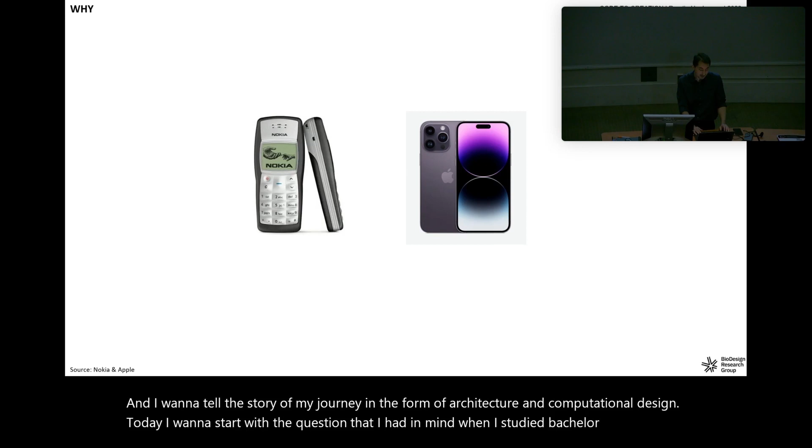I want to start with a question that I had in mind when I studied Bachelor of Architecture. I always wondered why there is a big difference between other industries' generations. For example, telecommunications now versus 20 years ago, or automobiles now versus 50 years ago. But in architecture, we are building our structures and constructions exactly the same way we did 100 years ago or even more, and it's mostly the same all around the world. Yes, there's a little difference in developed countries, but not that much. In comparison to other industries, we are a lot behind.

And the result is obvious. This industry, construction, is responsible for more than a third of energy consumption, waste we produce, and many other disasters. Considering the increasing need for houses, buildings, and many things, we really need to reconsider how we think about architecture and how we make everything.

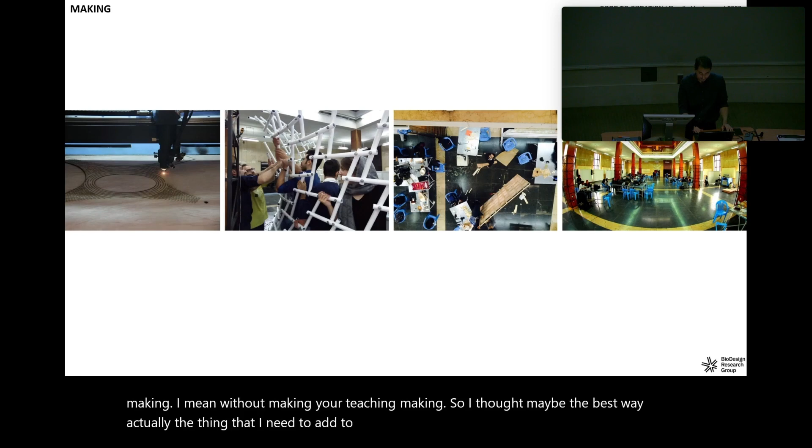When the university asked me to start teaching around 7 or 8 years ago, I started to think about how we are teaching architecture, which is about making, without practicing the making. Without making, we are teaching making. So I thought maybe the best thing I needed to add to my courses was about making something in the field of architecture.

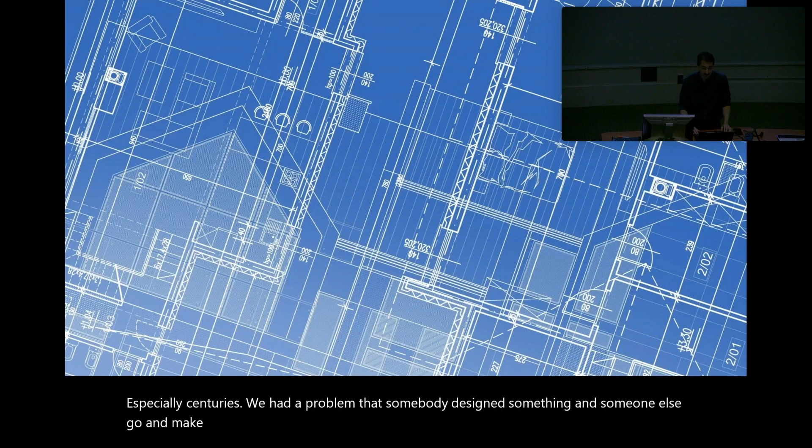When we talk about making and teaching in architecture, consider that thousands of years ago, when a person wanted to build something as an architect, the builder, the drawer, the designer, all of them, most of the time, were the same person and the same group. But after Alberti, during recent centuries especially, we had a problem: somebody designed something and someone else went and made it. When you're designing blueprints, you're not designing the building, you're just designing a notation of the building. You're not talking about every single detail in the building.

You just say, for example, 'the big rectangular wall here,' and the builder thinks about how it starts—for example, cutting the first brick, how to place the second one, how to frame this, and what the hierarchy is.

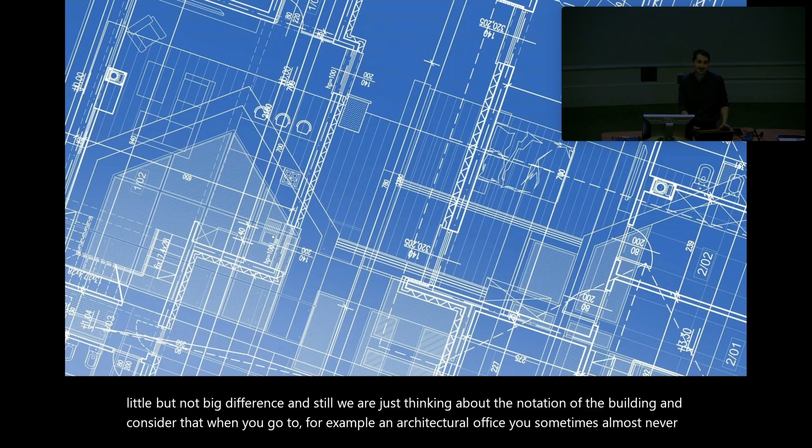With BIM technologies, it is changing a little, but not a big difference, and we're still just thinking about the notation of the building. Consider that when you go to an architectural office, you almost never leave your desk—you're just working behind the desk, designing something on the computer, and you don't know anything about what's happening on the real construction site.

Sometimes it happens. So I started my career working in an architectural office. After designing some projects, I understood that it's not really what I want to do. So I started a new kind of startup office, whose mission was actually research in the field of architecture, especially about making and digital fabrication.

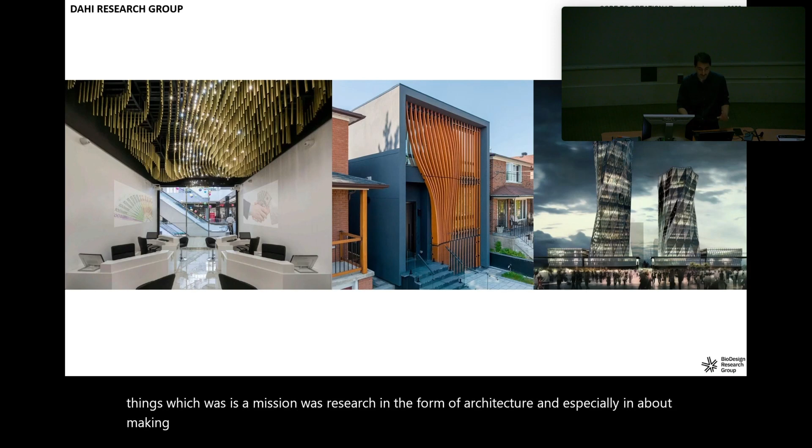After working on some different projects, most of our clients were actually builders and architects—we don't have any normal people as clients. We help architects and other builders to design, create, and build complex and new forms in general. After that, we understood that we needed a kind of digital fabrication laboratory too, because we cannot design something 100% new without knowing how we want to make it.

So we needed a prototyping lab. We founded a lab containing a robotic industrial arm, a CNC milling machine, laser cutters, and 3D printers that help us in prototyping our projects.

I want to start with some of our academic researches that we had in different universities. Some of them were 2-week workshops, some were a course, like a seminar course or a studio course. I want to describe some of them right now.

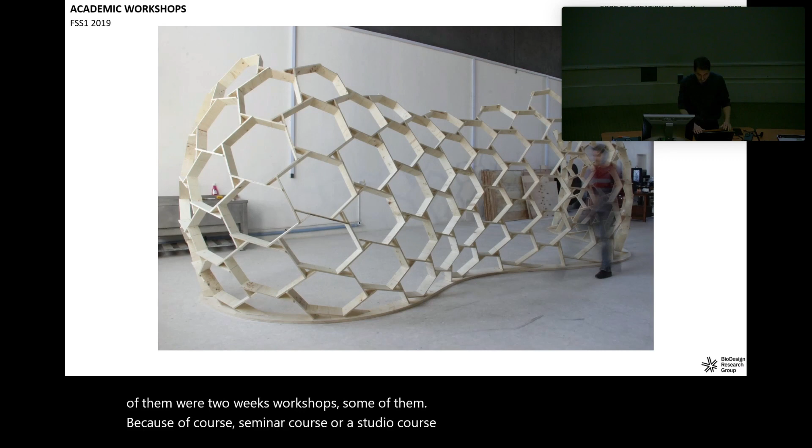All of these courses are about creating the atmosphere, space, and opportunity to experience an integrated design and fabrication process, but through computational design, not a normal or other method of design. We are trying to create the opportunity for students to experience how they can design something and build it in real scale, which at least at our university, the University of Tehran, was not something common.

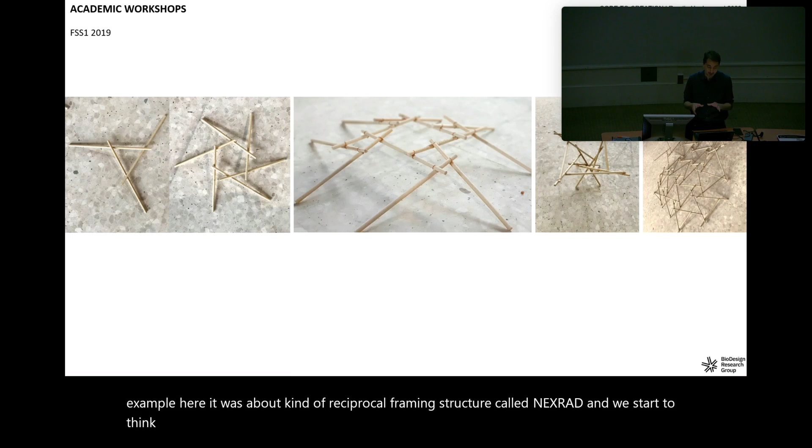So in our research project we always consider the topic. For example, here it was about a reciprocal framing structure called Nexorade. We started to think about how they work. Students and researchers first start to think, and they actually made some very basic models by hand, as you can see in the images.

These are simple wooden sticks. They put them together and create some form, from very simple to a little more complex. Then they extract the logic from the thing that they made—there's a logic behind these geometries—and implement this logic in a computational design platform.

We usually use Grasshopper and Rhino, I think you are familiar with it at least. And then we try to make some prototypes to see that our implemented logic, our code, or our design tool is working properly or not.

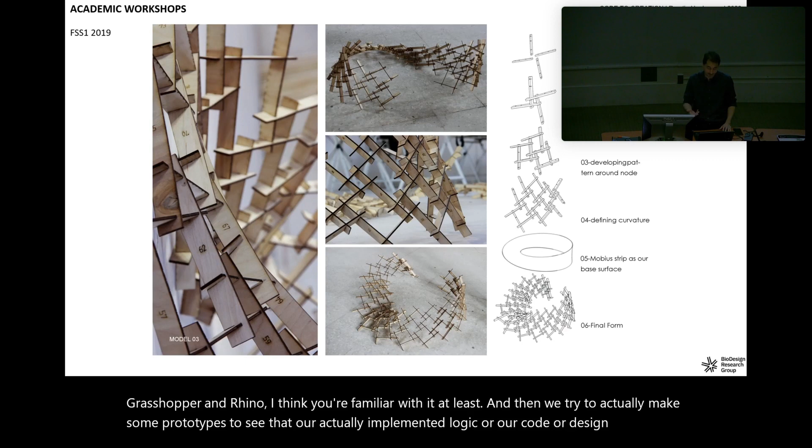These are, for example, some tabletop models from the logic that we had. We use a laser cutter and very small pieces of wood to create something like these. After that, we try to design our final system for our biggest structure, and we use that computational design tool to create some forms, create shop drawings, and create the final shape of the structure and final details, everything.

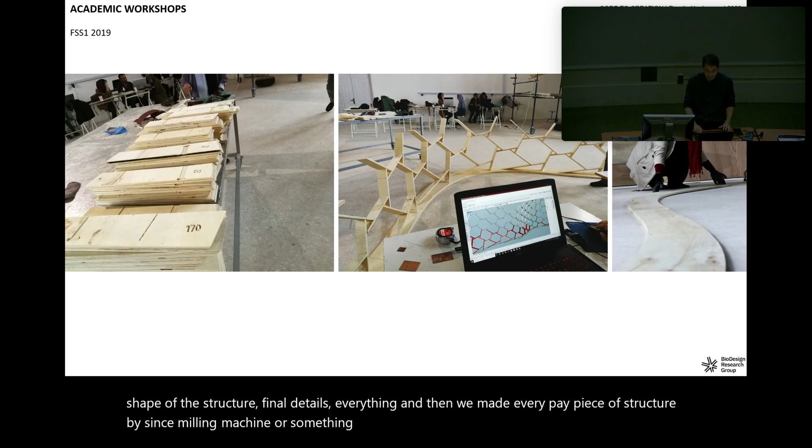Then we made every piece of the structure by CNC milling machine or something like that, any kind of digital fabrication tool—here it is a CNC milling machine. And then we assemble them together to create the final structure.

Consider that when we are using a computational design tool and digital fabrication tool, we are using a computer or robots—very simple robots—to fabricate the elements. So they don't have any special kind of knowledge or intelligence. You have to model every single aspect of your pieces or your design, every single bolt or screw, everything that you have in your construction.

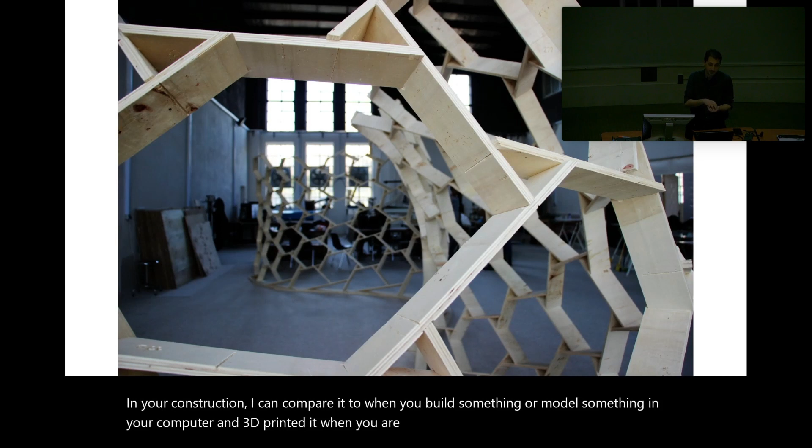I can compare it to when you build something or model something on your computer and 3D print it. When you are 3D printing something, you have everything on your computer. You are not designing the notation of the building—you are really designing the building, because you are designing every single piece, every single part of it.

And finally, we built something like this in this research.

For another research example, we started to think about how we can create all of these structures that I'm showing today, which are non-standard buildings, non-standard construction. We don't use standard pieces, similar pieces, to make something like this. For example, this one has around 400 pieces, and all of them are different from each other.

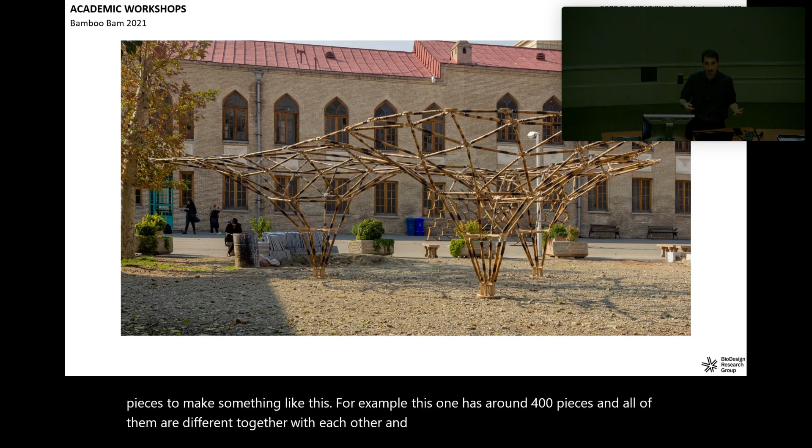So we make all of them one by one using something like a CNC milling machine or any kind of digital fabrication tool. For this one, we started thinking about how we can make something like this using bamboo, which is a more sustainable, non-industrial material. Since the pieces are different from each other even before fabrication, we had to have some knowledge about the material, so we started studying it.

We studied what is the thickness of it, what is the normal diameter, what is the strength, and then studied the previous works, the literature of the area, and finally designed some systems—some prototypes—that make us able to create something freeform.

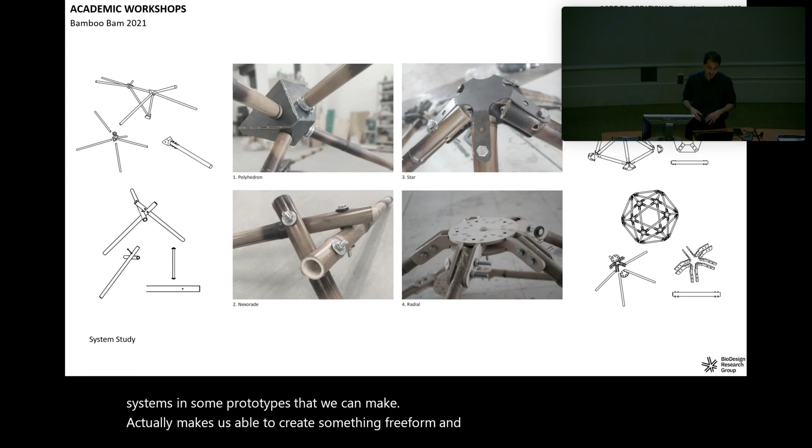These are some samples that we made in our lab. After prototyping, we make a decision on which one is better for us. And sometimes even standard digital fabrication tools are not suitable for you, so you need to hack them or modify them in a way that you can use to create your specific pieces.

For example, we couldn't find a long rotary CNC milling machine, so we hacked our normal CNC milling machine and added something to it to make us able to build these kinds of elements.

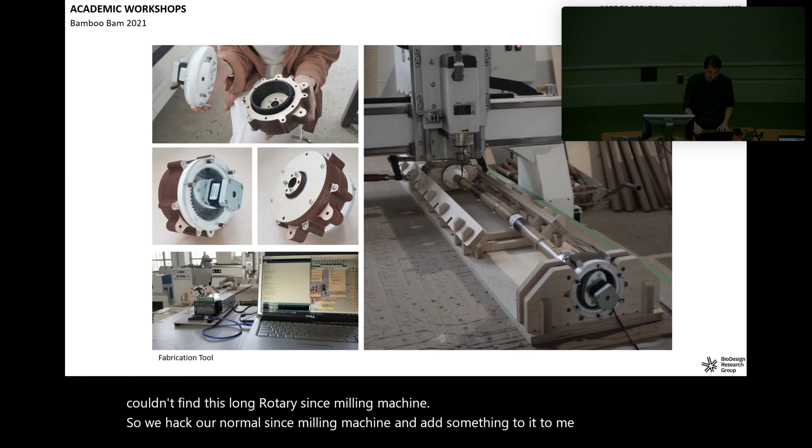And finally, we assemble them together. It takes about 1 day to assemble this. It was about 1,000 square feet structure in area.

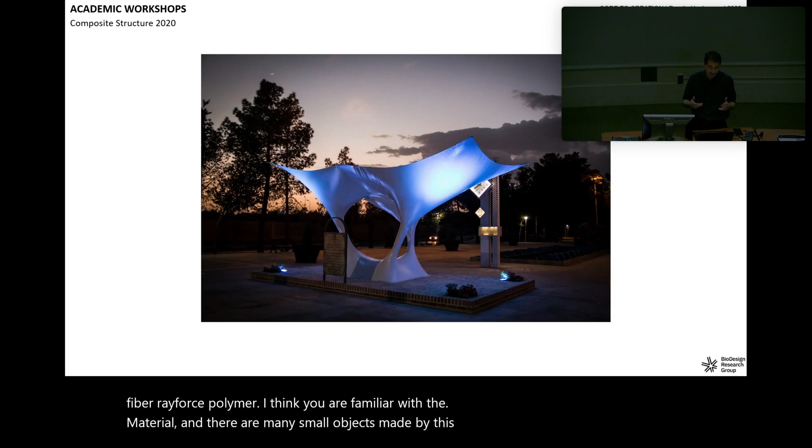Another one was a kind of commercial academic project. It has a special client that ordered this. It is about making a freeform surface out of GFRP, glass fiber reinforced polymer. I think you are familiar with the material.

There are many small objects made by this material, usually used in industrial design, for example scales. I mean object scales, not building scales like this, because you always need a mold bigger than your object. For a structure like this, with a span of more than 20 feet, it is a really big mold if you want to build it, and it is really expensive. So it is not the way that you can do it.

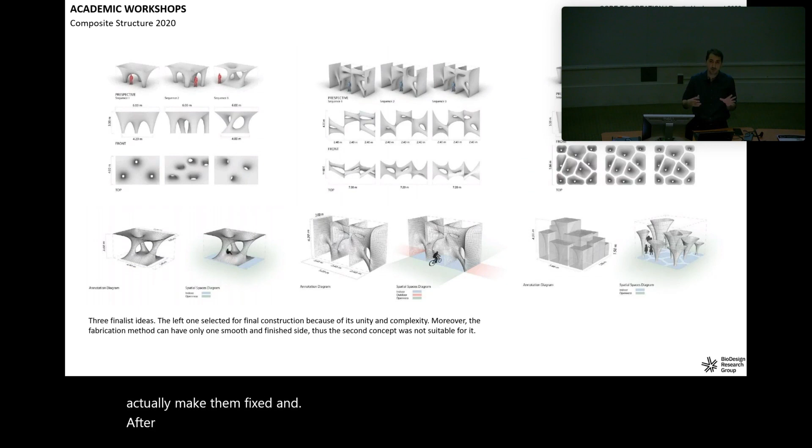Then we start the process with prototyping different objects in different forms. We use different materials, mostly resin, to actually make them fixed. After that, we design our final prototypes based on our experience and what we understand from the prototyping, and finally start to make the big structure.

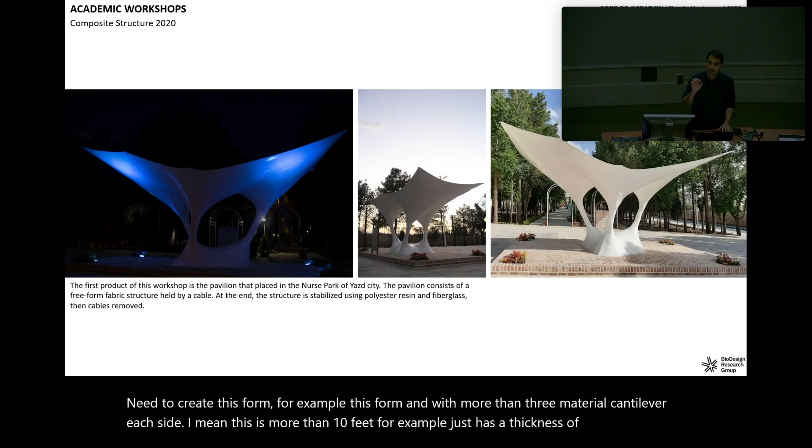It was an interesting thing. We create a big scaffold and use form-finding methods to create the fabric in a specific position. Then we try to shoot material, layer by layer, resin and fiberglass, to create this form. For example, this form with more than 3 meter cantilever on each side, more than 10 feet, has a thickness of less than 5 millimeters in the end. This is because when you make something with these form-finding methods and create a double curved surface like this, it is really high performance, and as you can see, it is very stiff.

And even when we wanted to detach the scaffold, we thought maybe it would shake a lot or transform a little. But after detaching the scaffold, it doesn't shake and stands in its position because of its shape. It was very stiff.

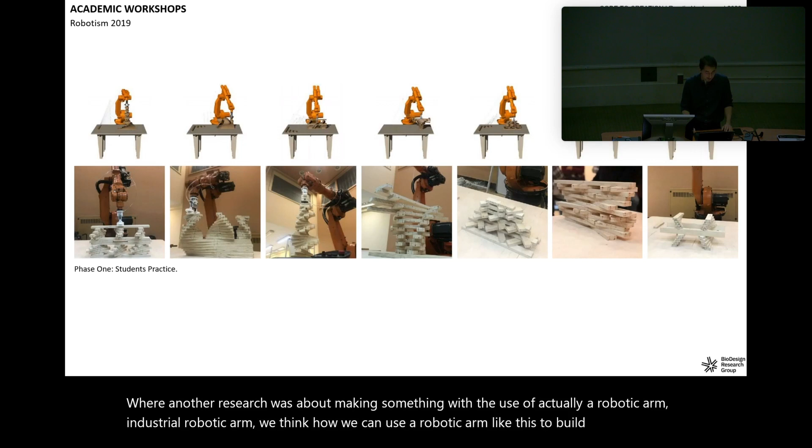Another research was about making something using an industrial robotic arm. We think about how we can use a robotic arm like this to build something with it, just build something. One of the easiest ways you can use these robots is using the pick and place strategy, where the robot can pick something, like a brick or a module, and put it in a specific way or position. By stacking them together, you can create lots of different forms in different situations.

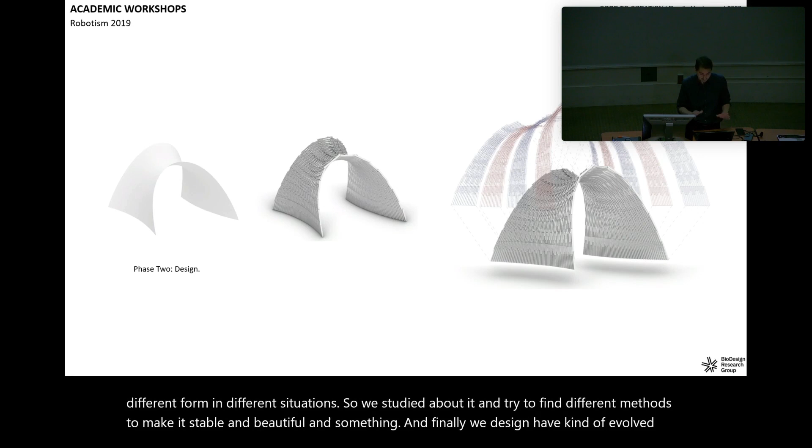So we studied this and tried to find different methods to make it stable and beautiful or something, and finally we designed a kind of vault at an architectural scale. Obviously, even big robots are really tiny in comparison to the scale of the building, so you need to split your surface. For example, here we divided it into 9 different pieces and built the pieces one by one.

When you are doing this, you need lots of simulation, analysis, and many things. Because, for example, when the robot is placing the bricks one by one, in your model you need to know all of the bricks, the position of all of them, and many other information about them. Sometimes, like this, your final installation is stable, but a piece of it is not.

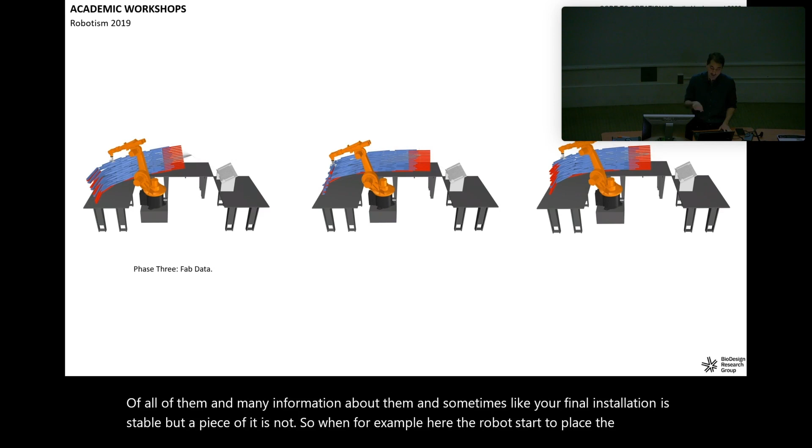So for example, here the robot starts to place our blocks, and the red one will fall because the pivot or center of it does not overlap with the previous block, so it will fall. So during the installation, the fabrication process, we place some extra blocks just to keep it in position, and finally make our pieces and merge them together to create our installation like this.

These are made from a kind of plywood, around 4 centimeters, 1.5 inches wide for each plywood. So as a shell, it is still very thin, and it is hollow too.

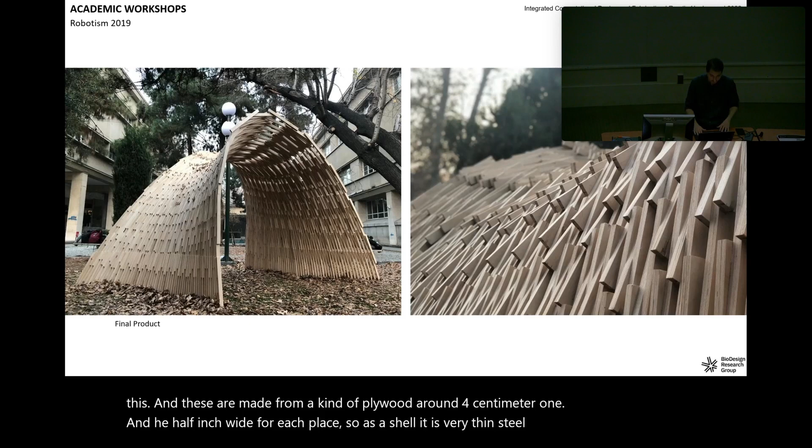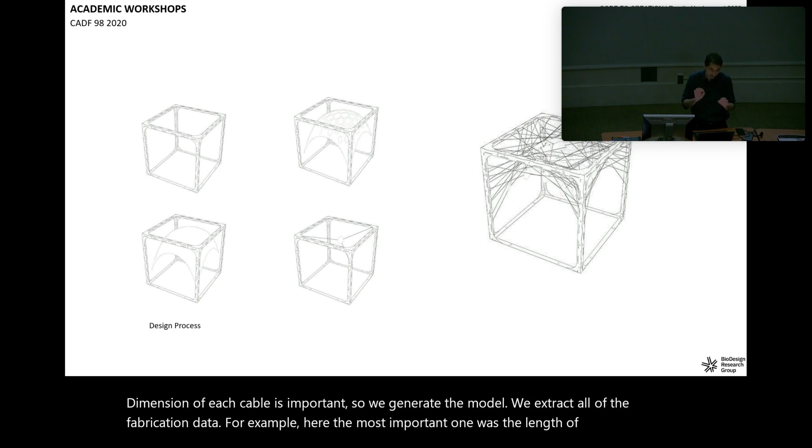The dimension of each cable is important, so we generate the model and extract all of the fabrication data. The most important one was the length of each cable, because they actually finalize the position of each plate. Then we cut the cables to a specific dimension and assemble them together to create this small installation. It was very cheap and very easy to assemble compared to the others.

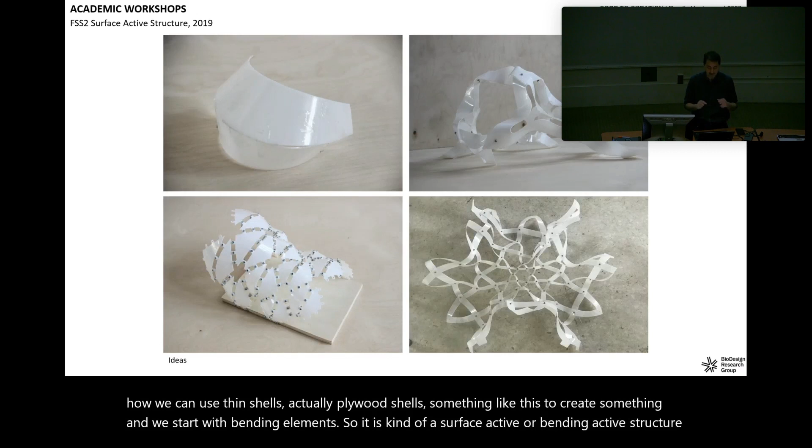Another project was about the performance of the material too. We thought about how we can use thin plywood shells to create something, starting with bending elements, so it's a surface-active or bending-active structure. We started prototyping small tabletop pieces to generate the system and understand how to work with them. The first prototyping phase is made by hand, obviously.

Then we extract the logic and create our design tools, using code to generate the bigger structure. We made some samples like these, and finally selected one of them to design a form considering the logic we created and developed.

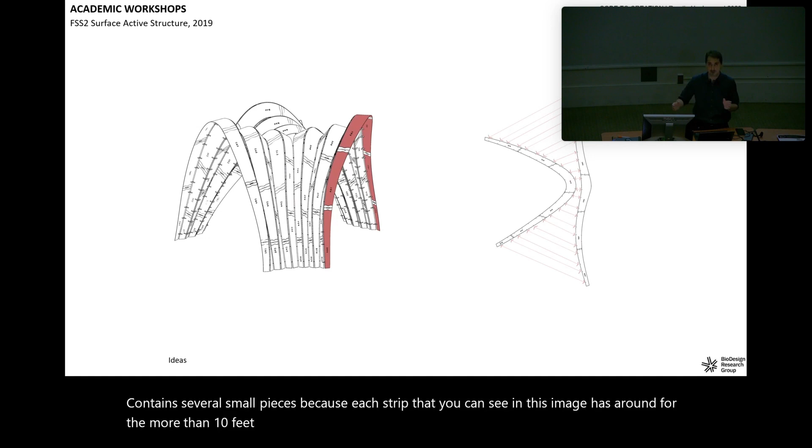Take these arcs, for example. Each arc contains several small pieces, because each strip you can see in this image is more than 10 feet long, so you cannot make one at once. So we made them from several small pieces, then tailored and joined them together.

Each arc has a kind of V-section as a folded plate, made of two pieces like this. When you join them, there are specific points on each side where you connect them together, like buttons. When we join them together, it gets its own final shape because of the feature of the material. So it becomes this way.

This is, for example, the first arc that we assembled. And after that, we join all of them together.

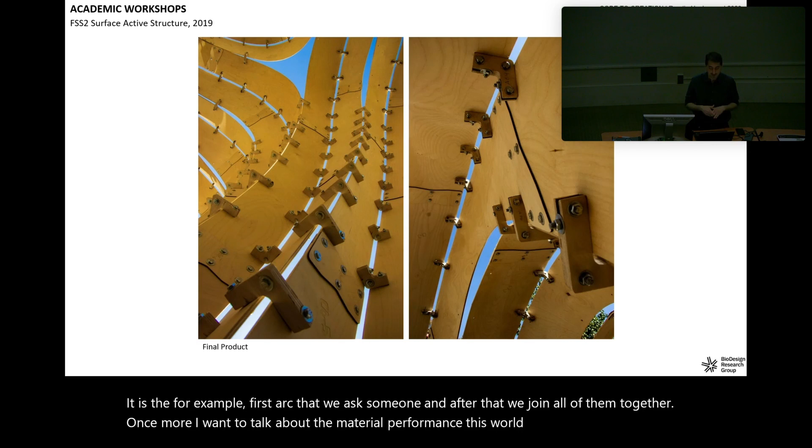Once more, I want to talk about material performance. This vault has a small span, but still more than 10 feet, and it's made from 6 millimeter thick plywood, around a quarter inch. It is folded and bent.

During the fabrication process, one of us goes on top of the structure just to tighten the final bolts, and its shape didn't change a lot. It was super strong, even more stiff than what I had in mind about the structure, and it was interesting.

Most of the time, it is not easy to simulate these kinds of structures using computational tools like FEM analysis software that structural engineers use. So we usually just guess about it and do this by prototyping.

So we make small prototypes, test them, and see how they work, getting some intuition about whether we can build something bigger or not. And sometimes they fail, and that's part of it, because you're making something 100% new, so you don't know anything about the structural performance.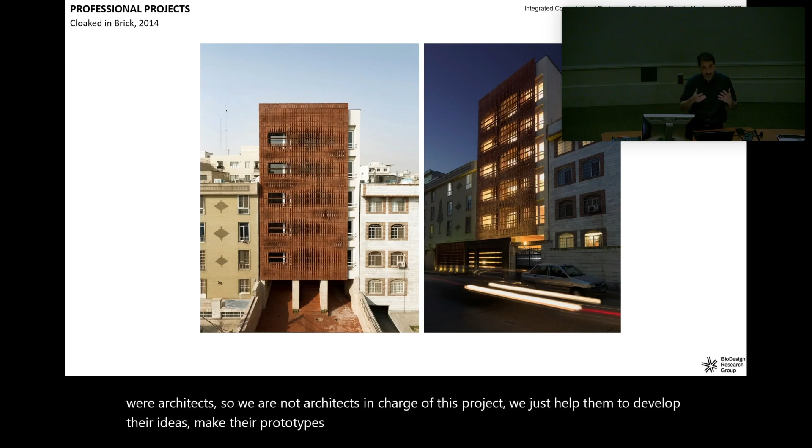For these projects that I'm trying to present right now, this is the Dahi Studio project. As I said, our clients were architects, so we are not the architects in charge of this project. We just help them develop their ideas, make their prototypes, and generate the design tool inside the computational platform, then build what they want to build.

For example, for this one, the main client wanted something from brick because it is a traditional material in Iran. As you can see, the other buildings in this image are made from brick too, but in a modern way, not in a traditional way.

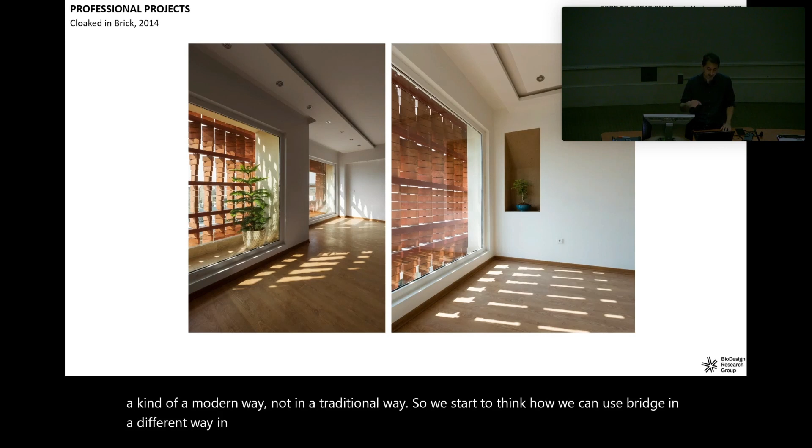So we started to think how we can use brick in a different way in a structure like this, considering that privacy is a very important thing in some regions of Iran. After people buy apartments like this, they usually cover the balcony, so we thought maybe we can do it ourselves in a way that we like. So the whole second skin had an idea like this.

We started to think how we can make something with brick. The first thing we had in mind is that just by rotating this, the final installation is actually stable and static, but placed in a rotated position. Just by rotating this, we can control the privacy, the daylight, and the view, and many things.

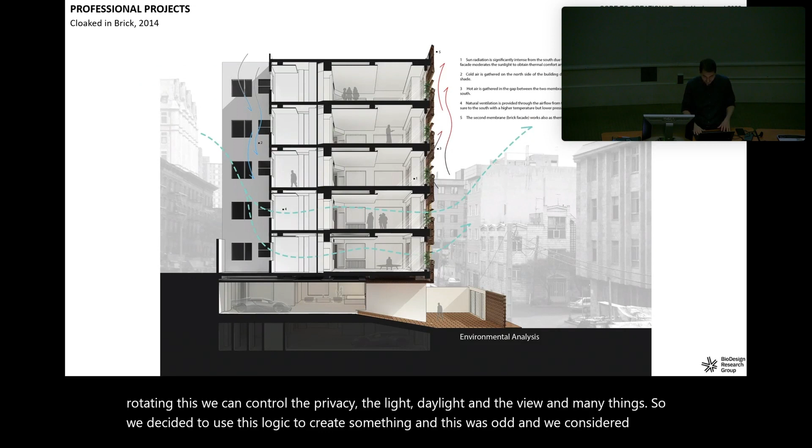So we decided to use this logic to create something on this facade, and we considered different aspects of it to make something in the end. So we made some prototypes, and finally we developed code that could help us create the geometry.

Because when you want to model something like this, for example this building, this facade has 8,000 bricks, and you need to model them one by one for your fabrication process. You cannot use normal 3D modeling software to create something like this - you can, but it's not efficient at all, and you cannot develop your design that way. So we usually develop special computational design tools for each project that let the main designer easily play with it.

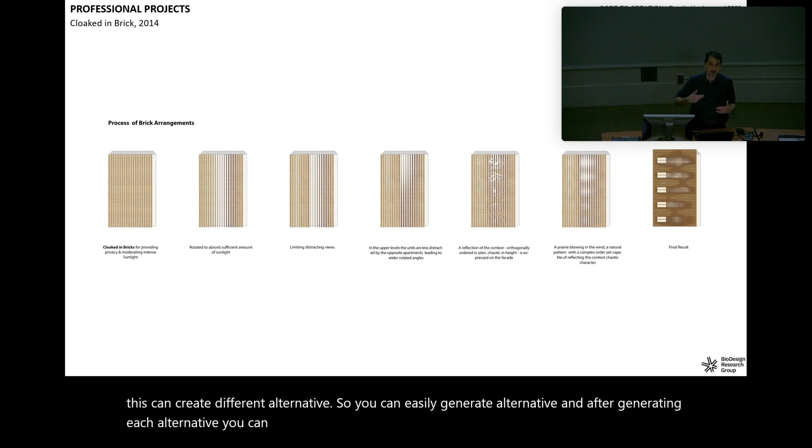For example, just having 20 control points that you play with can create different alternatives. So you can easily generate alternatives, and after generating each alternative, you can easily generate your fabrication data, which I want to talk about.

Another project I want to talk about has the same concept, but in a different way. It is the second skin for a residential building in Toronto, but it's made from wood because the client wanted something like this.

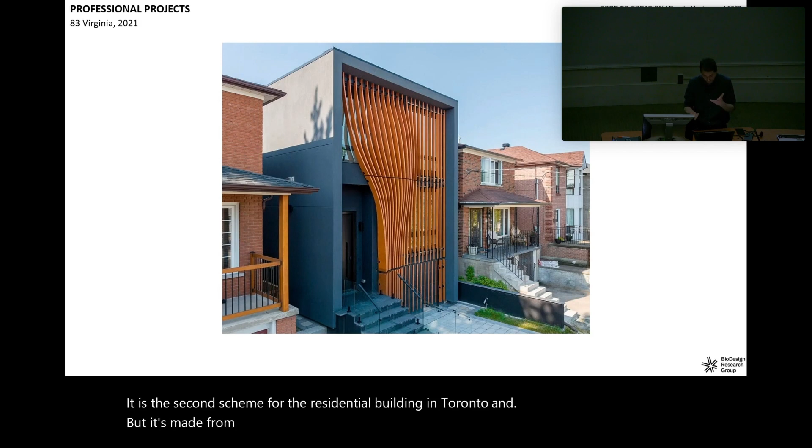We started to design something as a kind of curtain in front of the building, but in this specific project, the client wanted it to be transformable. They didn't want to cover their windows always, so there's a transformable platform on it that can retract the elements and create a view for the people inside. So you can control the shade and anything in the structure.

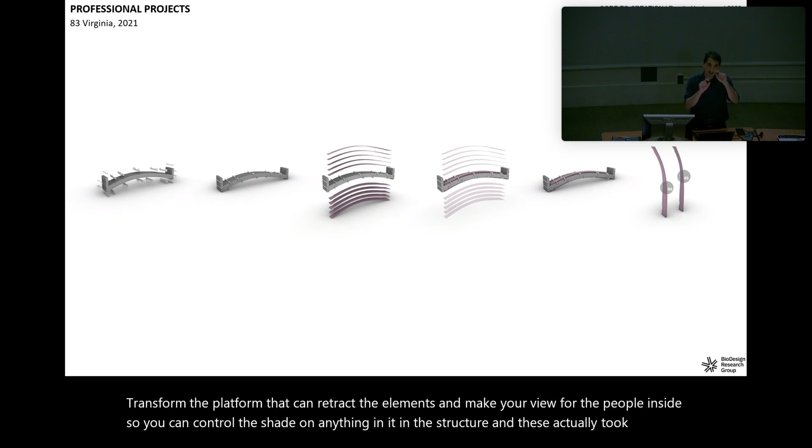To build these elements, we need to put thin layers of wood on top of each other and glue them together to create that form, because it is a complex form, and all of them are different from each other, like other projects.

So we started prototyping in our lab. We created different pieces for our layers - each element has approximately 12 feet in length. We placed them on top of each other and used a mold to form them into their final shape like this, and after a day we had our final element, which was something like this.

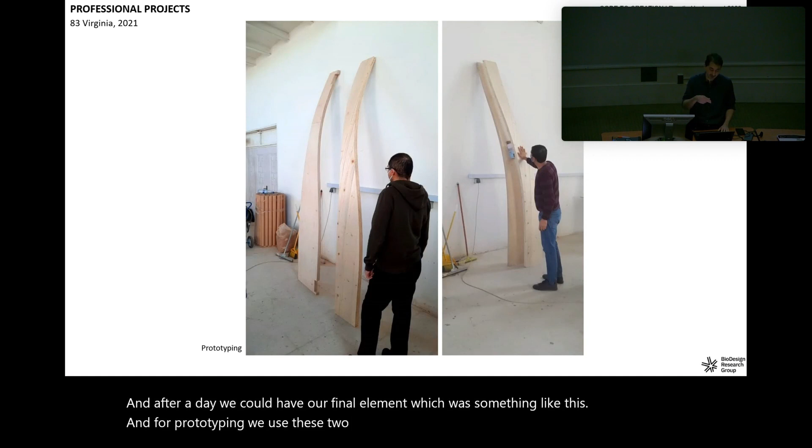For prototyping, we used 2 different materials for this project. One was a kind of timber, and the other was 6 millimeter thick plywood, which, for some reasons, we continued with - it was easier to use, so we decided to use that one. For each single part, we had to make the mold because it is different from the others.

And then every day we made two molds, for example, and pressed the elements on top of each other and glued them together to create our pieces.

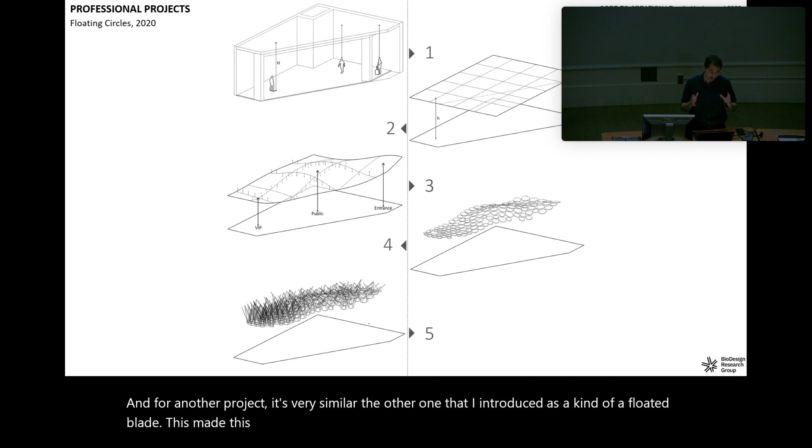For another project, very similar to the one I introduced, it's a kind of floated plate. This was a big office with a very tall ceiling. They wanted a false ceiling, but a freeform one, to define a specific height in different spaces of this office. So we used that concept and placed many circular plates in the space, using cables to attach them to the ceiling and position them in a specific way.

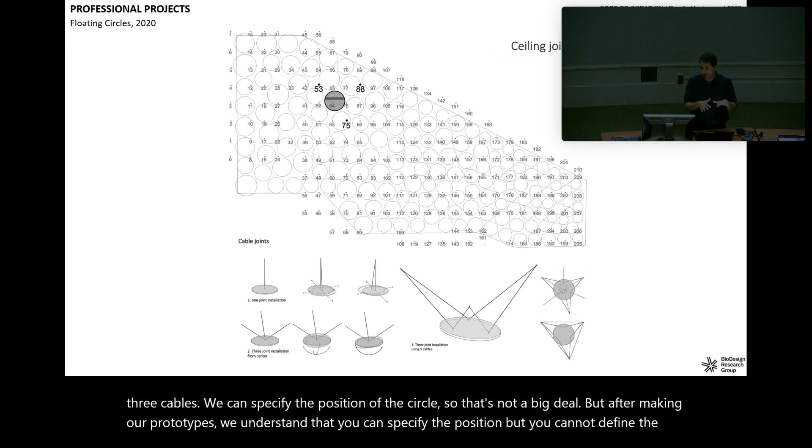When we started designing this project, I first thought that with three cables we could specify the position of the circles, so that wouldn't be a big deal. But after making our prototypes, we understood that yes, you can specify the position, but you cannot define the tilt, because it's important which angle you want to install and fix it at. So you have six degrees of freedom, and you need six cables for each plate. Finally, we had thousands of cables to install all of these elements.

In this project, we couldn't attach cables to every single point we needed on the ceiling, so we had specific points. We surveyed them and imported them into our computational tools, and finally generated the length of each cable. We used a kind of circle packing algorithm to create our surface out of these circles.

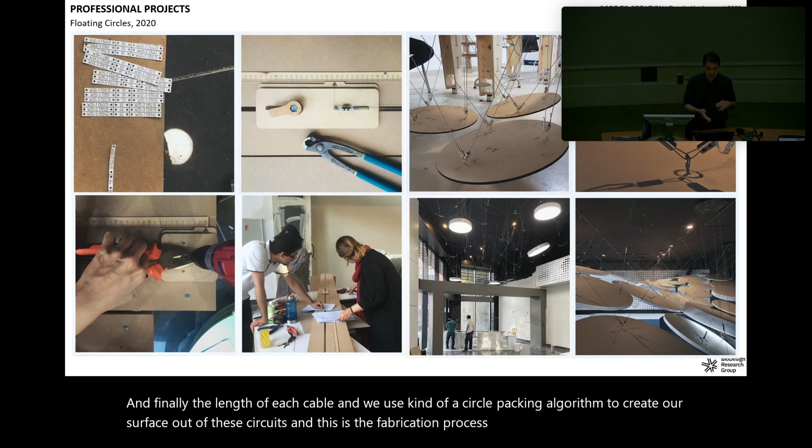And this is the fabrication process. In these kinds of projects, the lengths of elements, the lengths of the cables, are very important, because if you change one of them, the tilt or position of the plate will change. We didn't know of any digital fabrication tools we could use to cut a cable to a specific length and create the hook, because when you add the hook, the length changes. So we created our own ruler.

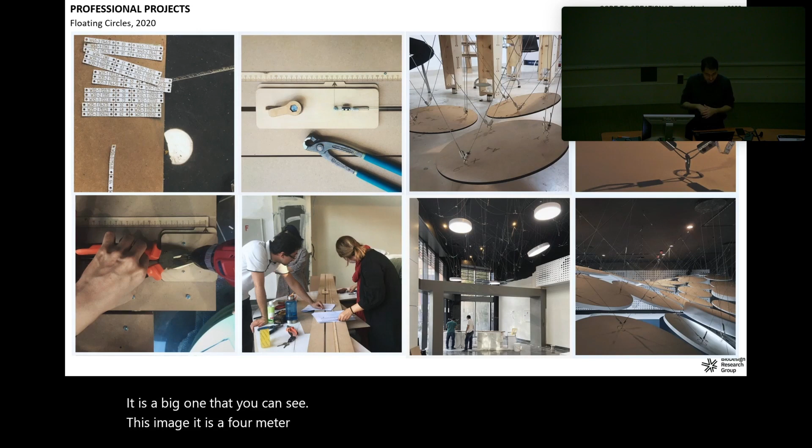It's a big one, as you can see in this image—a 4-meter long, 12-foot ruler with two nuts and two bolts for the hooks, so we could fix it at a specific dimension. Then we used the two bolts to create the hook on the two ends of the cables. This way, we could create each cable at a specific distance. Then we tagged each one, because we needed to know where it should be placed in our structure, since all of them were different from each other. And this is the way we created this surface.

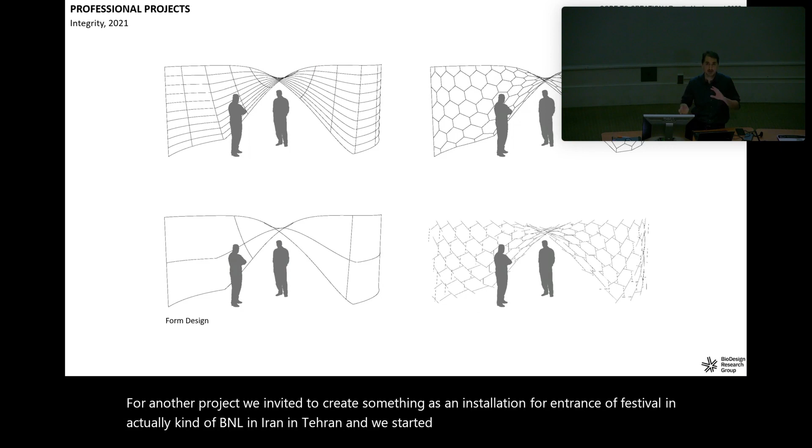For another project, we were invited to create an installation for the entrance of a festival, a kind of biennale in Iran, in Tehran. We started thinking about a gate using the technique we developed in our previous research. So we thought about a kind of vault or gate, and developed our surface. We had the same structural system I showed previously, but upgraded it a bit because it's a commercial project, so quality matters.

We used a CNC milling machine to fabricate hundreds of elements like this, then painted them and assembled them together. For this structure, it takes only one day to assemble something like this. And this is the final structure we made out of these pieces. We made our elements out of 18mm thick plywood, and these are about two feet in size on average.

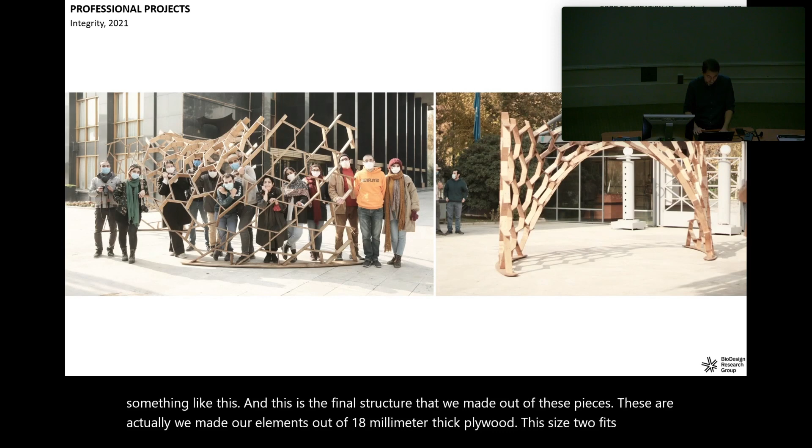And it contains several suspended elements with different lengths in a specific position. By logic, it is similar to the previous projects that I mentioned in this presentation. Another project I was involved in was building a kind of tensegrity structure.

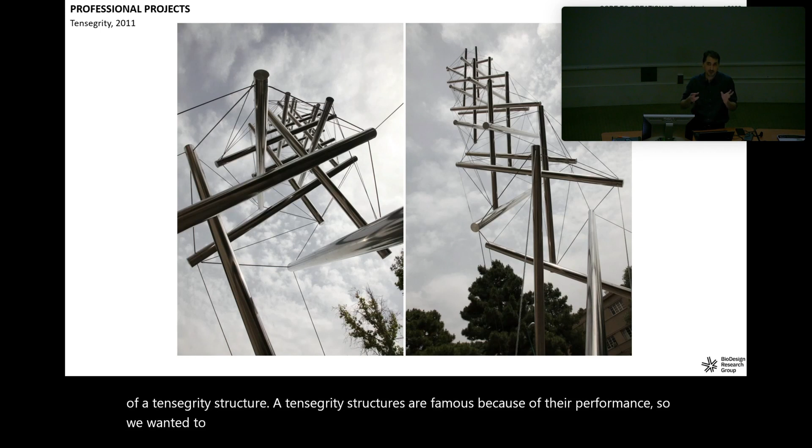Tensegrity structures are famous because of their performance, so we wanted to understand how we can make something like this as a tensegrity structure. This is a tower about 30 feet long. There are several structures like this. We just wanted to analyze how we can use this, so we started with prototyping like other structures.

At that time, unfortunately, Grasshopper was very new and there were not many computational design tools available for simulation specifically. So we made most of our prototype by hand. Then we used software like 3ds Max or AutoCAD to create our final model and make something like this arc or that tower.

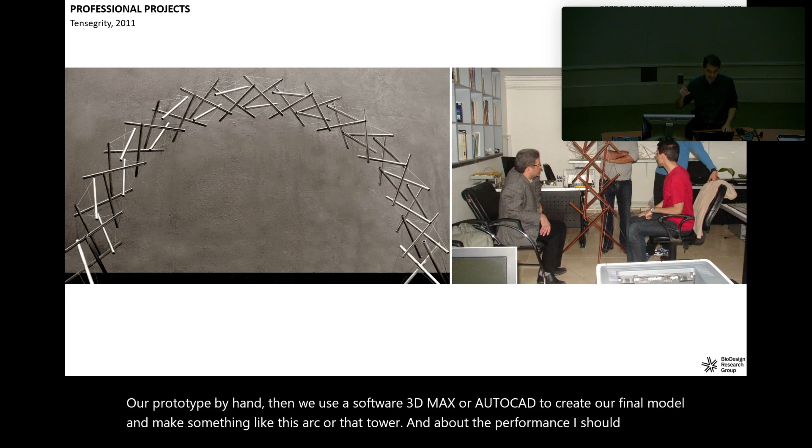About the performance, I should say that 30 feet height tower had a weight of less than 500 pounds. It was really light in comparison to something similar, but it was not that stiff. I mean, it moved by wind easily, something like that.

It is not just about a small project. We had several, actually we can use this logic in big projects too. For example, this is another project in Istanbul we participated in. The point about this project, the rest I want to show are some of the professional opportunities in this field. Most of the time, as I mentioned before, the architects in the architectural office, sometimes at least, do not pay attention to details, they just create something.

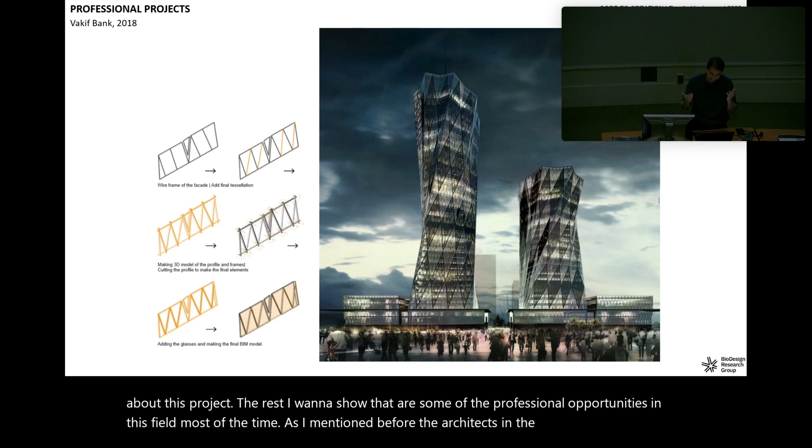For example, for this project they just prepared a kind of wire mesh as the first diagram that you can see there, about creating this surface, not anything more.

When you want to build something like this, you need thousands of panels. I think for this one there are 4,000 panels. Because it is rotating and twisting and changes shape from a square to a kind of star shape, all of these panels are different from each other. I mean, for each panel we have 4 repeats, but that's it. Still more than 1,000 different panels are available actually in this structure.

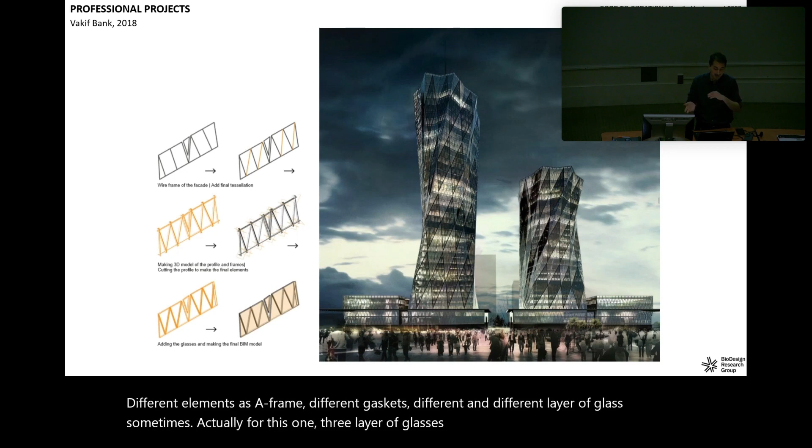And we need to actually create a shop drawing for every single panel in projects like this. Every panel is made from different elements as a frame, different gaskets, different layers of glass sometimes - for this one, 3 layers of glass. And many other things, many bolts and holes, the cuts that you need for every single element in your panel. So there are lots of decisions that you need to make to create something like this, making these panels, and then assemble them together to create the final structure.

For this one, for example, we actually developed a kind of generative tool that gets the wire mesh and generates the shop drawing by itself automatically. We had these things in our previous projects too, but this one is a little different. So we generated that tool and created all of the shop drawings, and we call it kind of a BIM model, but with high LOD.

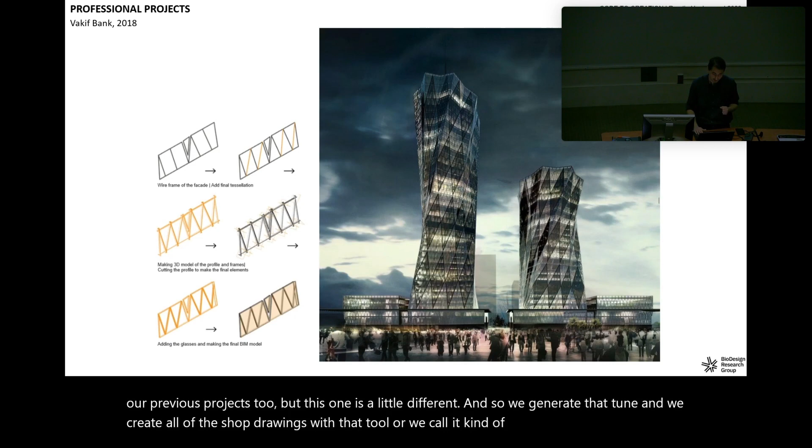A similar thing about this project - this is a company, our client was a company that built this kind of structure. So this structure is not our design. We developed the design tool for this kind of structure.

For this structure, actually it is a little worse because most of the time architects just provide a kind of surface, nothing more, not the wire mesh, just a surface, a kind of Nurbs in Rhino or something like this, and the rest is the work of the fabricator or contractors.

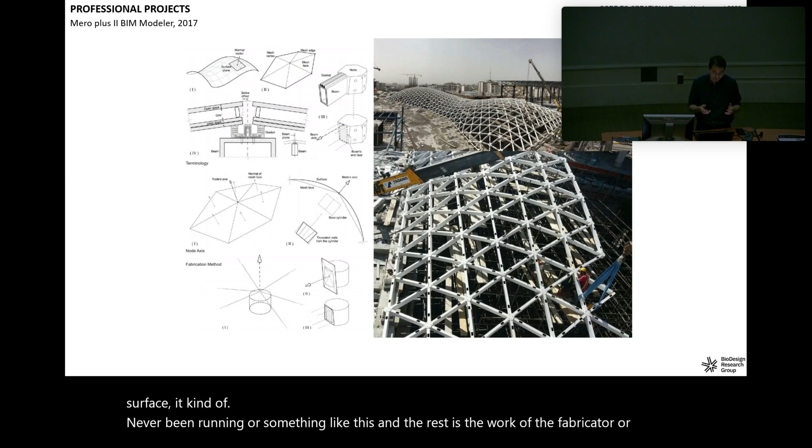So one of those fabricators contacted us to create something that could convert the single surface into a kind of BIM model containing every single element - every bolt, every joint, every piece that we have in this structure.

To create something like this, you need to solve some geometrical problems. It is not something very complex, it is just about mathematics and geometry. So to reach the final shape of each joint, you need to solve, for example, several mathematical problems.

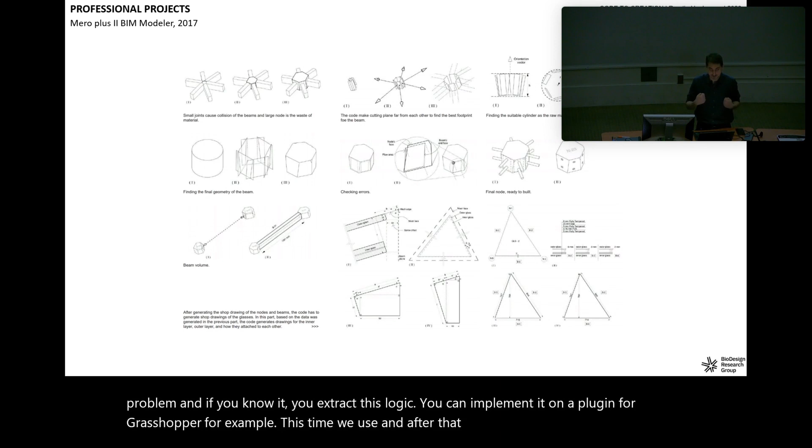If you know it, you extract this logic and implement it as a plugin for Grasshopper - this time we used that. After that, we actually gave this plugin to the fabricator, so they import the surface and get the final shop drawing for every single piece that they have in their structure. And they made several structures with this plugin.

It prepares joints, the final geometry of joints, G-codes for the milling machine that needs to create the joints, the pieces you have as elements, and layers of glass. And there are several projects like this.

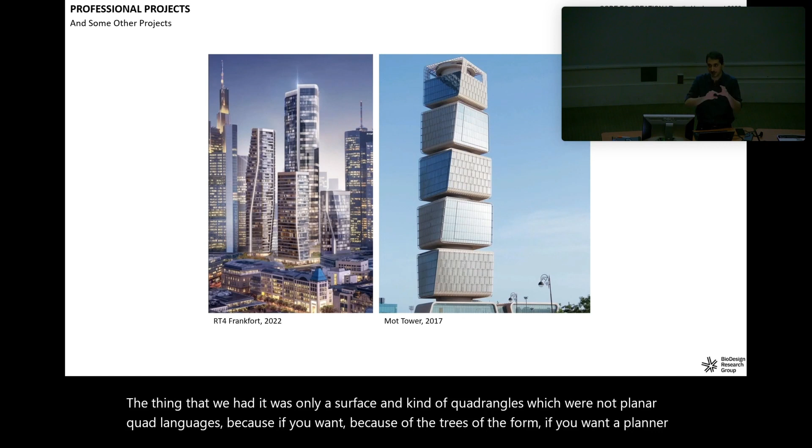For example, this Mot Tower has the same story. What we had was only a surface with quadrangles, which were not planar quadrangles, because of the twist of the form. If you want planar pieces, you need to cover it with triangles, not quadrangles. So these panels are a little twisted.

We unroll them, using the structural system they actually use, to translate it to a model we can build in a planar position. When you tilt and twist it, you reach the final form. So we actually use the inverse technology to understand the fabrication data for this project.

We also had a chance to work on a course with Jonas at Virginia Tech, a similar thing, entitled Integrated Computational Design and Fabrication. It is exactly the same thing that I described for you.

In this project, we had a question of how we can use bamboo to create the structure, but in a different way that I cannot describe the details of right now.

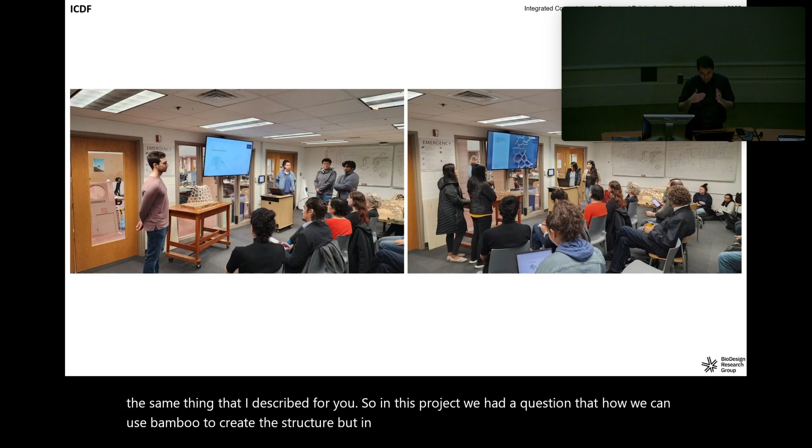Students tried to generate different forms and create some tabletop models. We had a very great review session.

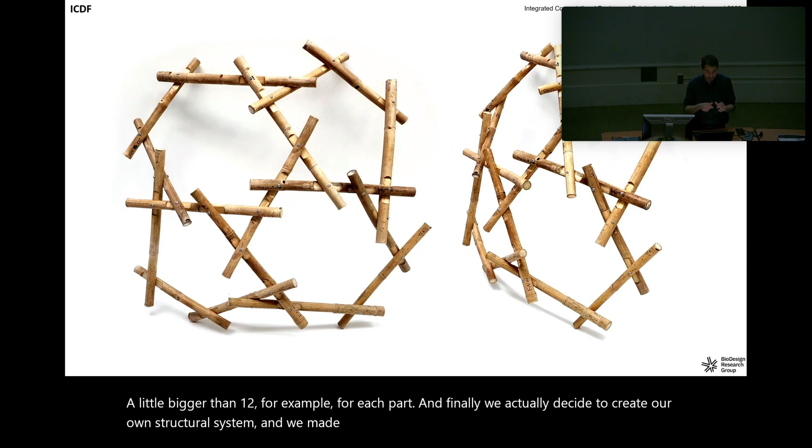Finally, we decided to create our own structural system, and we made some prototypes to see how it works, and whether it works structurally or not. Then we assembled it to test it and see how it works.

Right now, these days, we are making the elements. It contains more than 300 elements. We are using an ICDF facility to generate and create all of the elements one by one.

We hope that we can assemble the final structure by the end of the month. We need to see if it works or not.

Finally, I want to say thank you for having me. If you want to read more about this project, you can use this QR code to see my other projects too. Thank you so much.

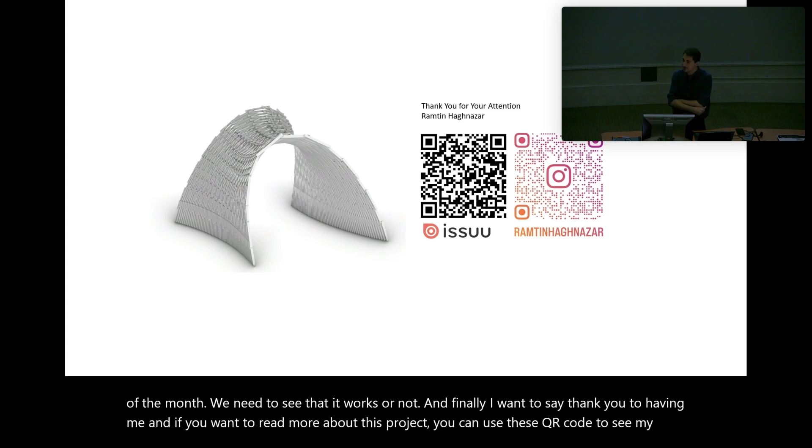Q: What adhesive holds this one together? Is it glued together? A: Yeah, it is partially glued and nailed.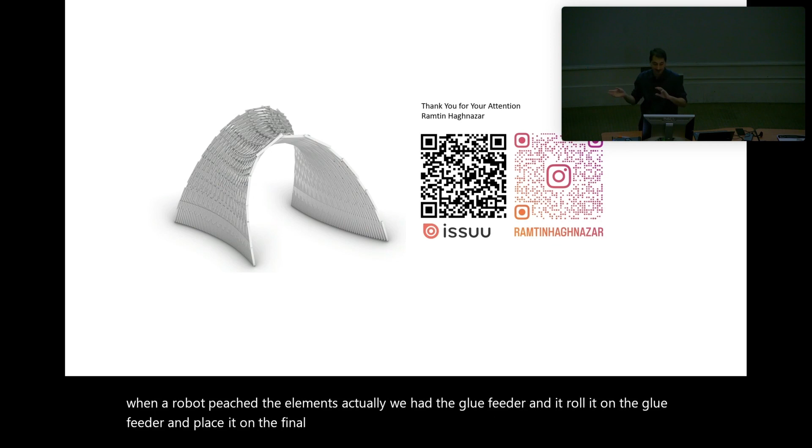This is actually the robotic placement. We had a successful prototype where a robot picked the elements — we had a glue feeder and it rolled onto the glue feeder and placed it in the final position. But my teammates finally decided to change it and add nailing to this. I still think the glue was working.

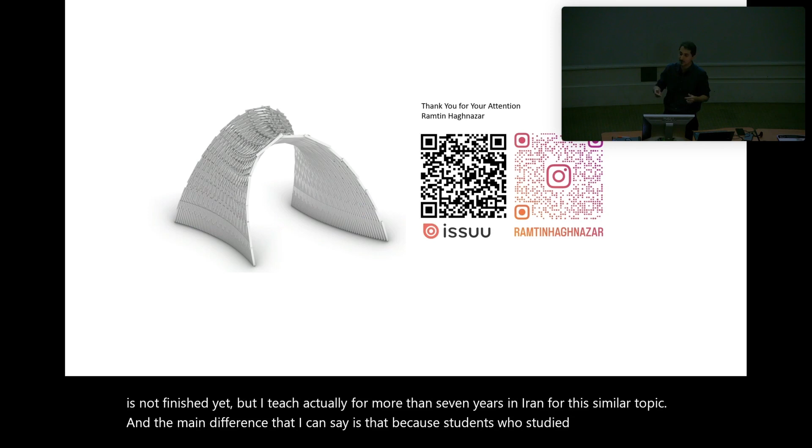The main difference I can say is that students who studied architecture in Iran have a stronger background in mathematics, so they can deal with these problems more easily sometimes. This is the only main difference I can see, but it's not always true, because everywhere you can see such students.

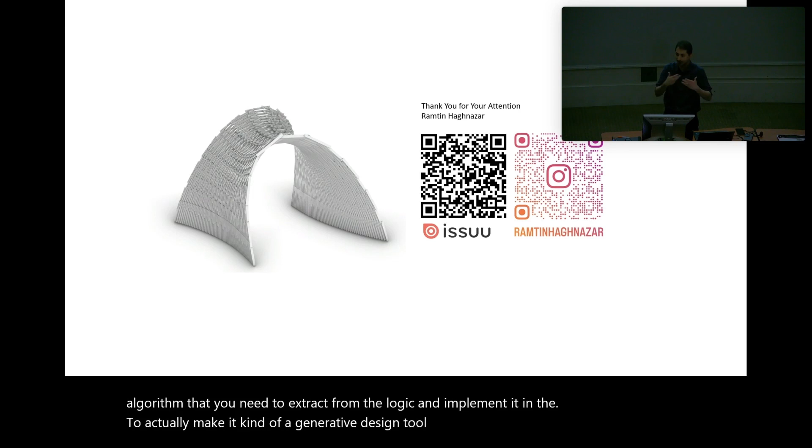The most important thing when somebody wants to participate in this area is, most specifically, the hardest part is about 3D geometry, solving 3D geometry, and the algorithm you need to extract from the logic and implement in code to make a generative design tool that can regenerate everything for you. If everybody knows about these two things and can deal with them, they can work in this area easily.

Regarding reflections on changing material palette and the challenges of working with other materials — for every single professional project and most of my research, we always use industrialized material, which, for example, for that brick facade, we had 8,000 bricks.

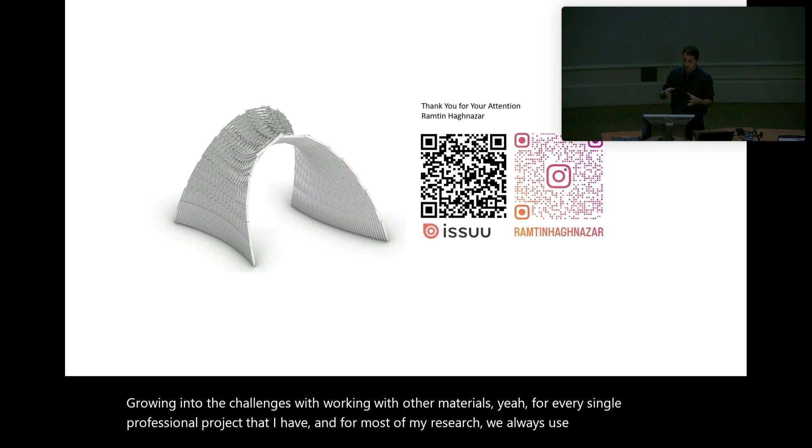All of them are similar to each other.

In our new project, we are using natural materials, for example bamboo, that are completely different in shape, and you cannot cut them at every part you want. So you need a different system that lets you cut it whenever you like.

So that's it. All right, last chance for any questions. Hello, you started off asking questions about how architecture can contribute, particularly about housing conditions, trying to produce more housing. I was wondering if you had thoughts on how this work, which deals with complex forms and geometries, translates back to those building conditions.

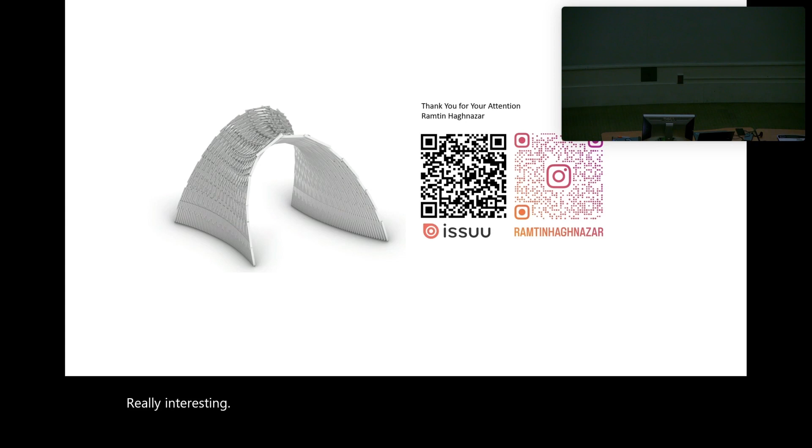Actually, that question had two different parts. First, it was about shape, that it is always the same. Second, about the technology, which is not sustainable. About the shape, it is obvious that computational design can reach different ways and methods to generate novel shapes. It is easy to create these kinds of things with computational design tools.

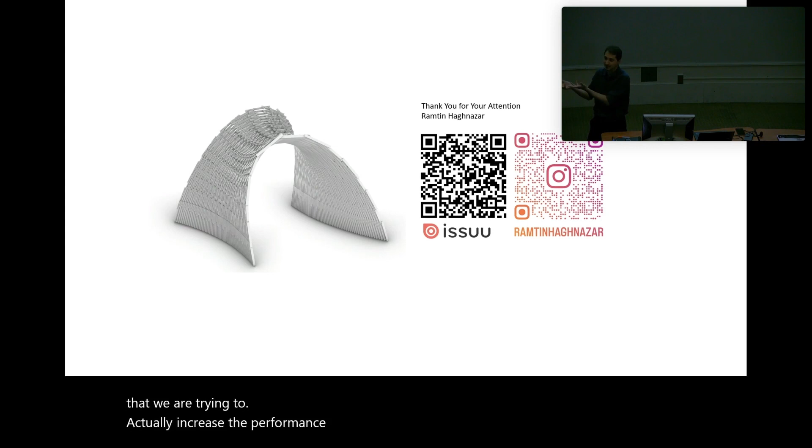But about sustainability and actually increasing performance, we had the opportunity to work on high performance structures, and we dealt with it in this way. We have some other ongoing research where we are trying to increase the performance of fabrication, but in normal conditions. I couldn't have a chance to present them here, and we still don't have any results yet, so that's it.

You mean by cost of the project?

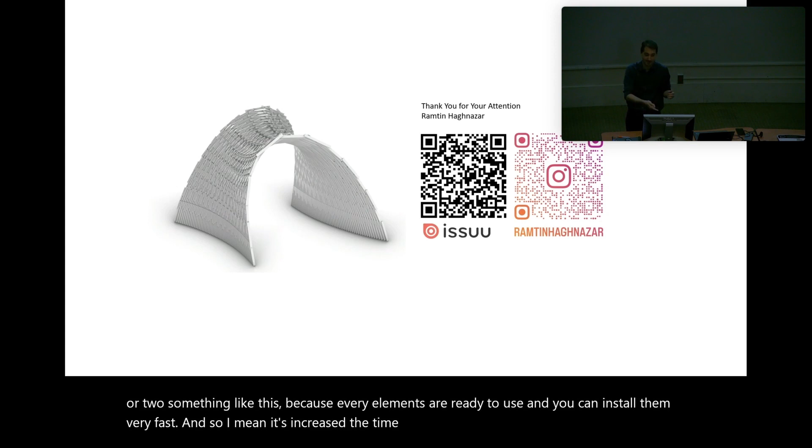In the professional project, obviously it's an expensive thing, but not always. In most of these projects, for example, we install them in a day or two, something like this, because every element is ready to use and you can install them very fast. So it increases the time you need behind the computer, but decreases the fabrication process, specifically the assembly process, and it decreases the amount of material you use.

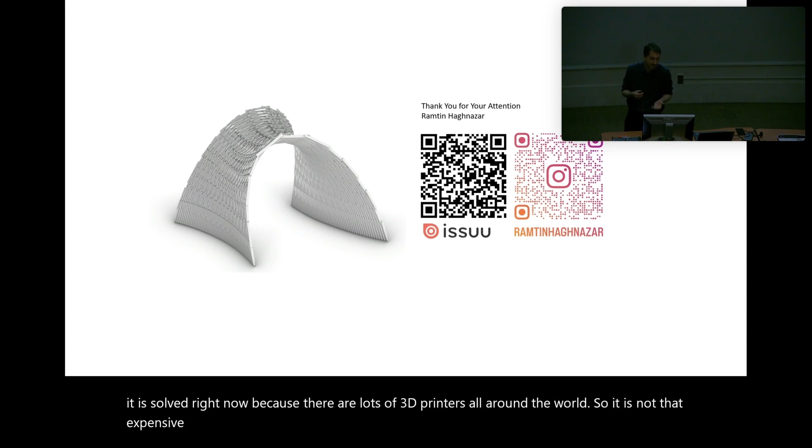But still, because this technology is not that global, using a CNC milling machine is expensive right now. But for 3D printing, I think it's solved right now because there are lots of 3D printers all around the world, so it's not an expensive technology these days. From some aspects, they are even cheaper.

But for this project up to now, sometimes they are twice or triple the cost of the normal thing in the structure. And we had mistakes too, because some of them were the first experience, and after that we found out that if we use a different way to do it, we can use cheaper material or cheaper technology.

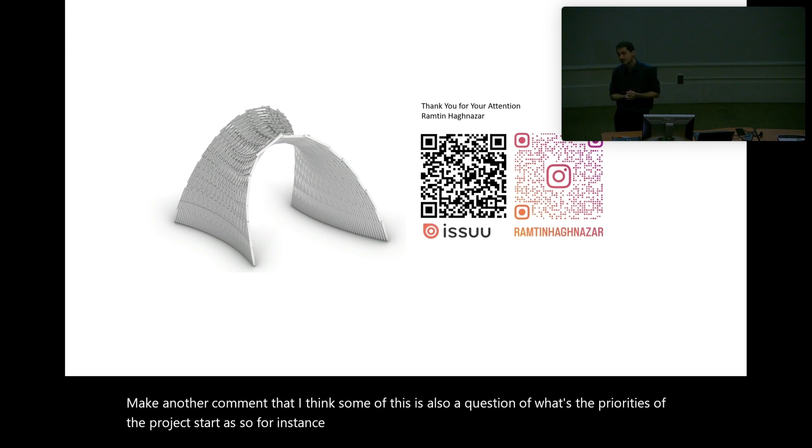I'll make another comment towards that. I think some of this is also a question of what the priorities of the project start out as. For instance, if you said you want the project to have very little labor, then the way you design the solution and parameterize it would take labor into account. It's not as if it has to be expensive. It's just that when the project is meant to be unique, cost is not the priority in this case.

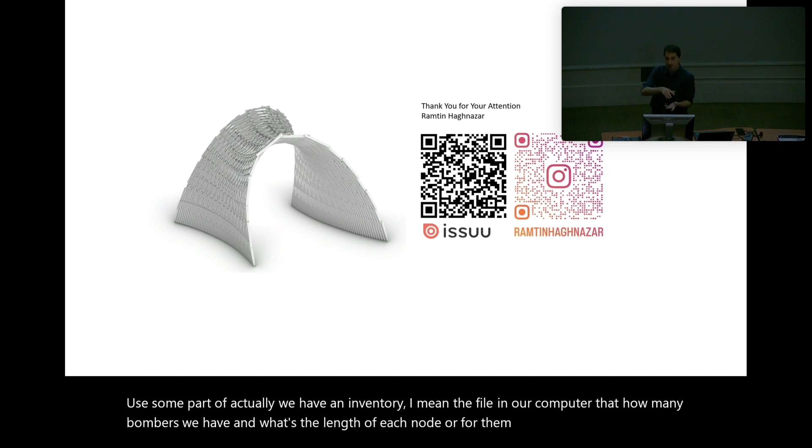Yeah, and I can add something else. Because we are modeling every single part, we have very big data about every single piece in our structure, and literally some of these projects are really wasteless—we use every single part of material. For example, for the project we're doing right now, we have an inventory, a file in our computer of how many bamboos we have and what is the length of each node. When we use part of it, we update the library, so we know what's left and can use it in different projects or places. So for material usage, I can literally say it decreased a lot, dramatically. But the technology is a little more expensive these days.

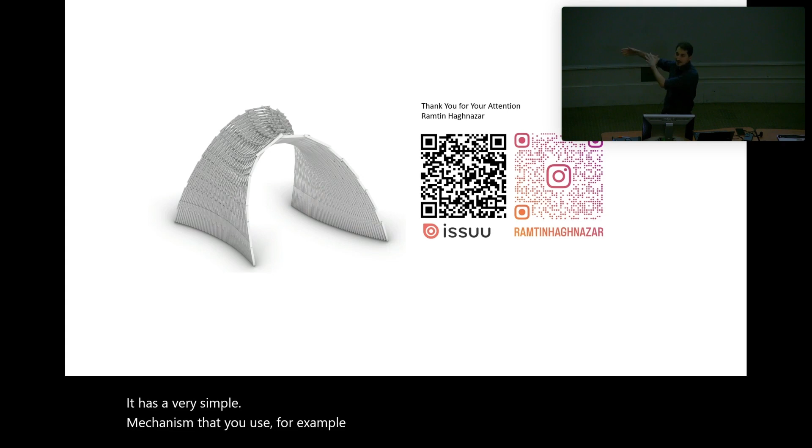I cannot hear you. It has a very simple mechanism, like a normal curtain in your house—it's just a wire that retracts the final elements, so they stack together and you have them inside. It's just a rail, a simple rail. That was not very expensive for you.